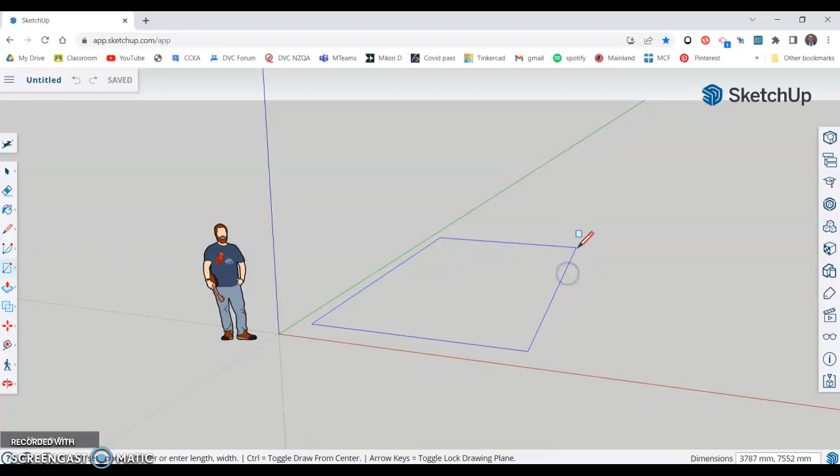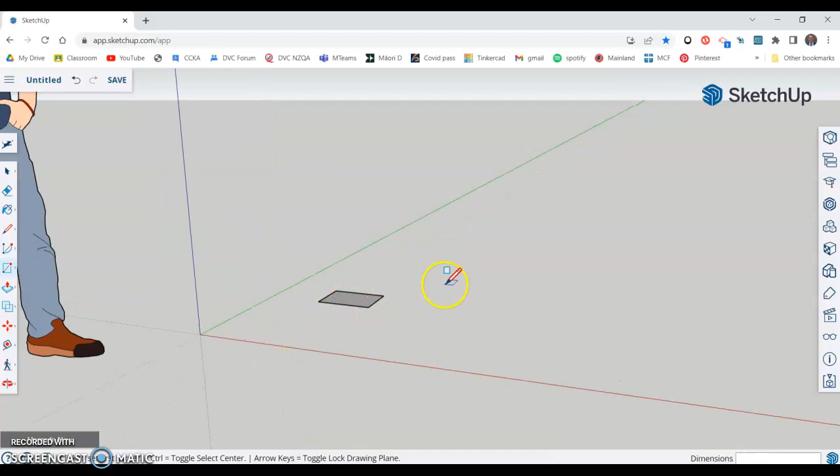First of all, you're going to draw the rectangle, which is going to be the base. Okay, so if you just draw one and click the button, but before you do anything else, you'll see down the bottom here, I haven't clicked anything, but you'll see the measurements. Now the measurements we want are going to be 297, and then if you put a comma and put 210 and press enter, that's actually now an A4 size. Okay, so that's our A4 sized rectangle, and this is where we're going to put our design.

So one of the first tools that I'm going to show you, near the push pull here, is one called an offset, and if you click on that, and when you come into the middle it'll go a bit funny. You click, and as you move out, what it'll do is offset a line right around the boundary of whatever it is that you have clicked into. So later on we're going to push pull that, and that'll be the side of our little maze design. So it's pretty simple from this point onwards.

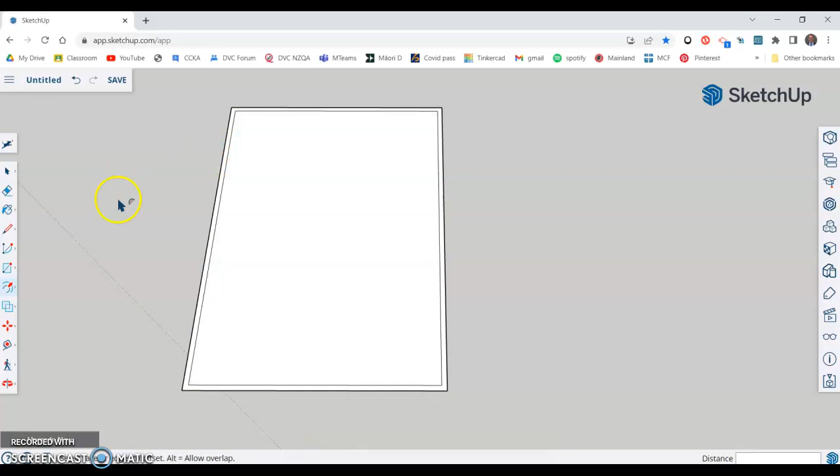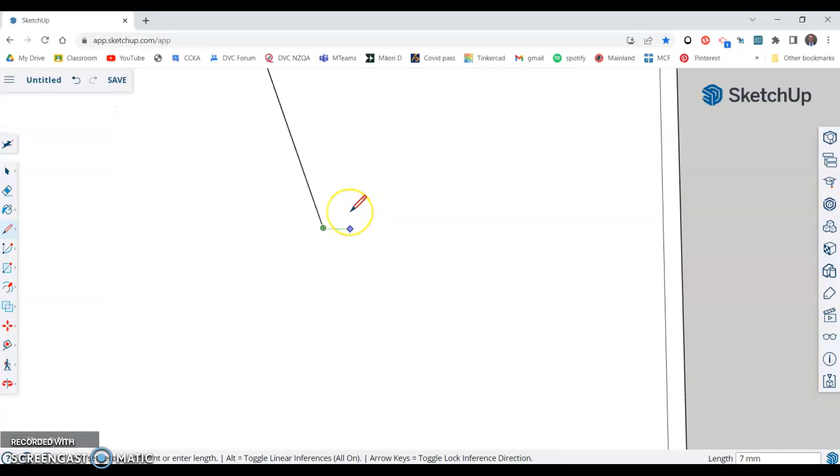Really what you're going to do is grab probably the line tool and just start drawing in the design that you've come up with. Now what you'll find is when I'm zoomed out, all of a sudden it's really hard to try and draw another line. So what you may have to do is zoom in a bit, and in fact the closer you zoom, the smaller you make these lines.

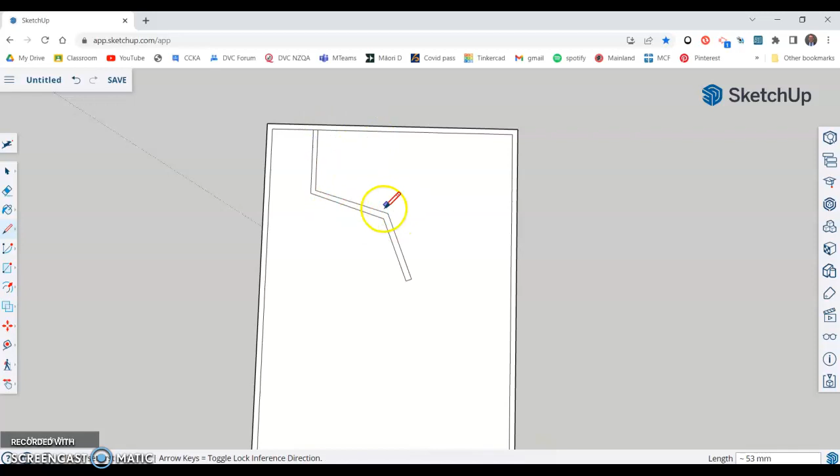Okay, so H for hand, just to move down a wee bit, and escape, and then come over here, click on this line, and then take it back, and you'll know whether or not that's actually a closed unit, because if I go to push pull, where's my push pull? There. And if I hover over the top of it, if it goes dark like that, that means that that shape there is fully enclosed, just like this one is, just like that one is.

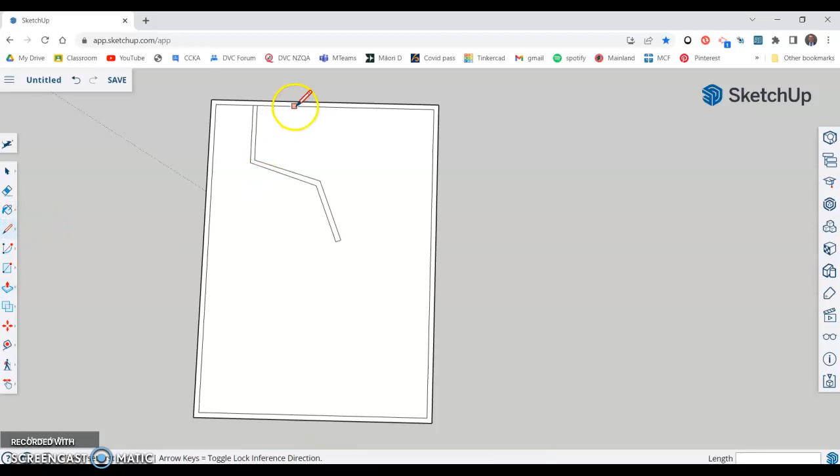I'll show you one more line. If I create another part of your design that might go down there, and maybe it comes back on itself a little bit there. Now do this accurately. I'm really going speedily. I'd love you to do it nice and accurately and try and get these lines as accurate as possible. So let's go to the push pull.

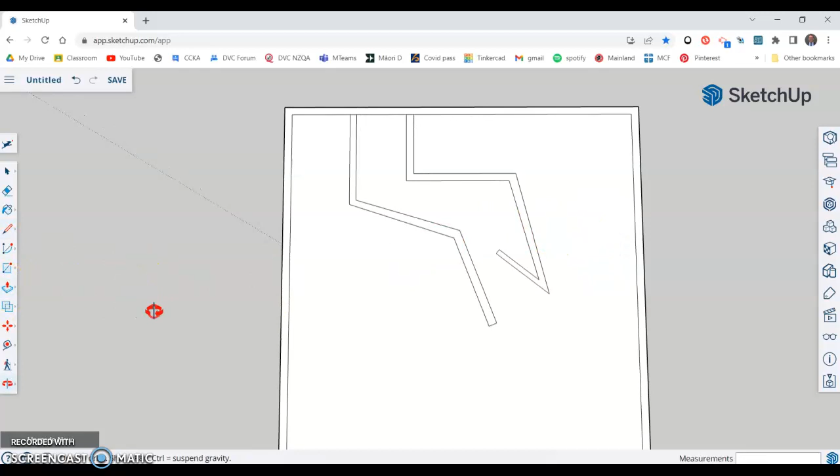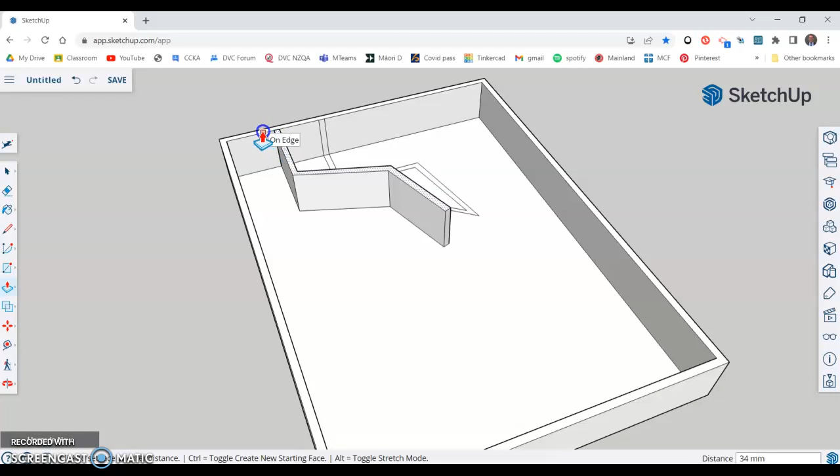Now once you've designed all of the lines on your final design here, the last thing that we're going to do is push and pull the sides up. So what we'll do is we'll take the sides up there like that, and then you can do exactly the same with each of these. Now if I bring it on up, I'd have to guess whether or not it's about the right height, but while I'm bringing it up, if I actually go over and hover on the edge there, it will actually match it. The same with this one.

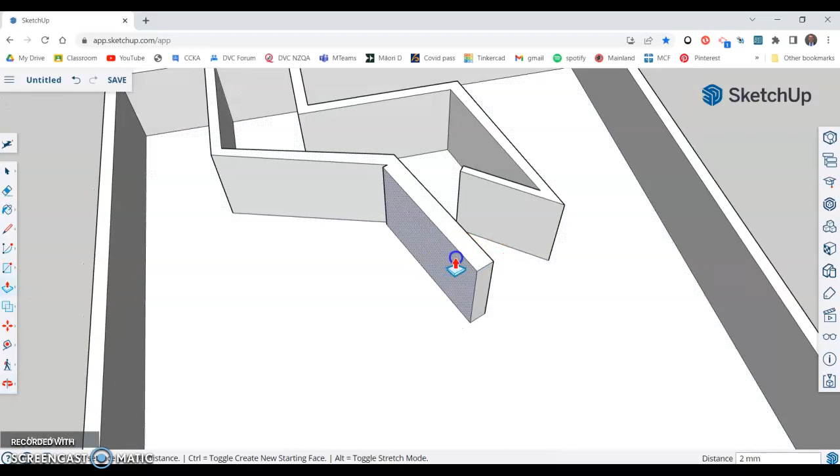If I slowly bring it up, go over to the edge and match the height there, and as you do it, you'll see that actually now you'll start to design your CAD model in 3D. There's a possibility sometimes of being able to push and pull lines, but they'll go a bit funny, so make sure you draw them accurately to start off with. I'll leave it there, see how you go in terms of coming up with your final design.

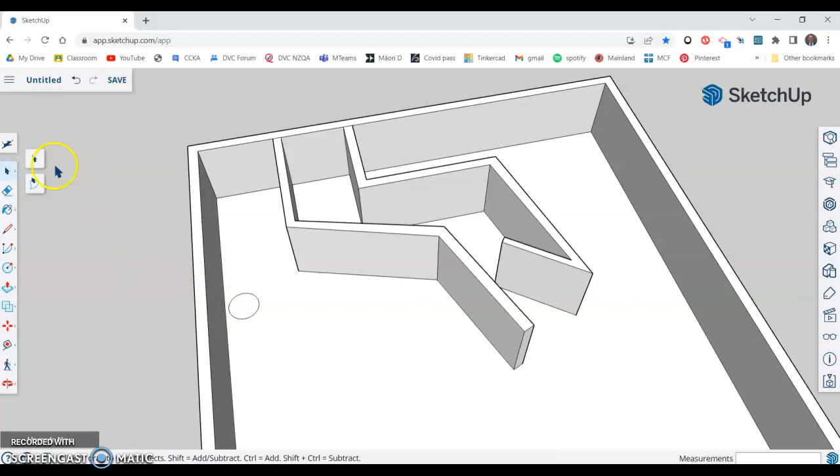Sorry, last thing is that if you wanted to show where you might put some holes in the base of it, you can draw some circles like that, and because it's actually a thin line on the bottom, all you'd need to do is select it with the arrow tool here, select it and press delete, and now I've got a hole in there.